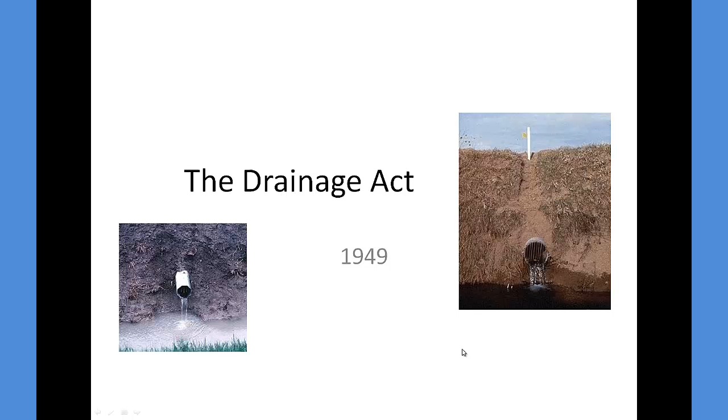This lab is studying the Drainage Act, which was passed in 1949 and hasn't been amended since.

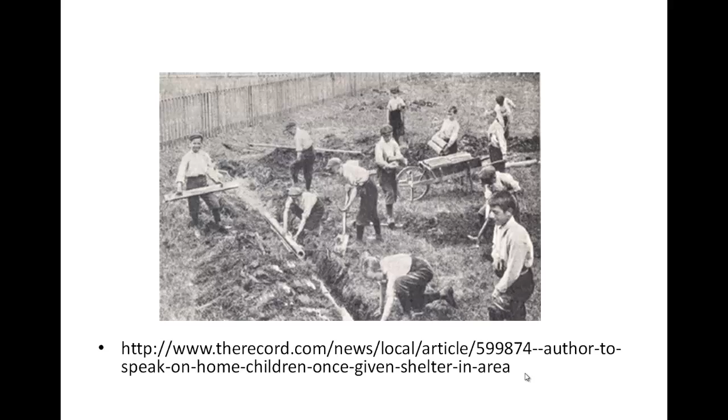To give some legal background, in law, which you'll be studying next semester, there are two types in Canada: common law and statute law. Statute law is written down numerically, with numbered rules we have to follow. The Environmental Protection Act is an example of that.

British common law is older than statute law, and it originates from when the king would travel from town to town, hear trials, and decide the verdict. He would sit on a bench carried along with him, which became known as the King's Bench, a tradition carried down to us. His decisions were recorded, ensuring consistency from town to town, so there was never any arbitrary decision.

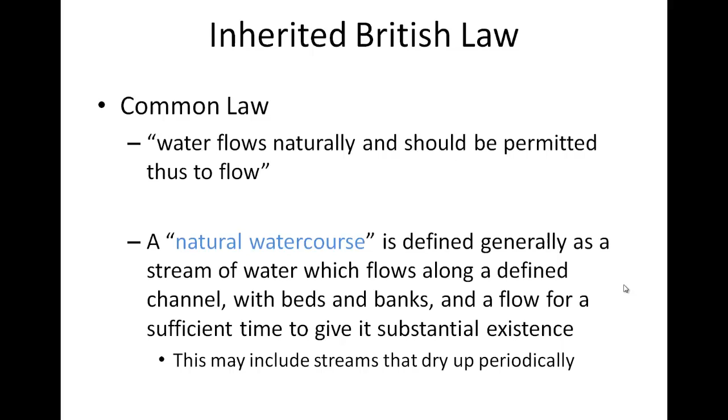One aspect of common law was that water flows naturally and should be permitted to flow. Water courses flow naturally and should be allowed to continue doing so. A natural water course is defined as a stream of water which flows along a defined channel with beds and banks, flowing for sufficient time to give substantial existence. Because it's a permanent channel, this includes streams that dry up periodically.

Along with the definition of a natural water course came the definition of a riparian owner: a person whose land is in contact with the stream. They are entitled to have that water pass by their land in its natural state, and to use it for natural or domestic purposes, like drinking water. They also have the right to obtain water power from it, though if they build a dam, they need approval from the Lieutenant Governor. They are also bound to submit to floods from natural causes.

If you're watching American media, you'll find this is not the same. The rights of a riparian owner are known as riparian rights, but riparian rights do not exist in the U.S., as their legal system evolved differently than ours. So if a stream flows through Texas and an owner wants to block that flow and dam it for their own use, they can, and it doesn't matter to the person downstream.

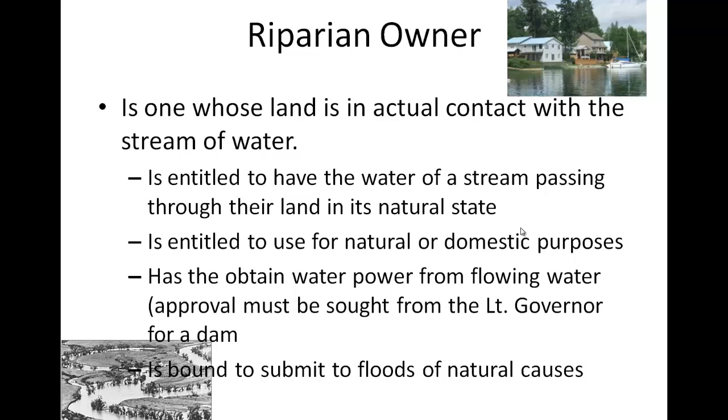Whereas if someone does this in Canada, they can't—they have to make amends to the person downstream. They can drain lands into the natural stream, provided it's within the drainage basin, and this has been backed up in the Ontario Water Resources Act. They're liable to upstream and downstream owners if artificial amendments are made to the stream which affect the flow negatively.

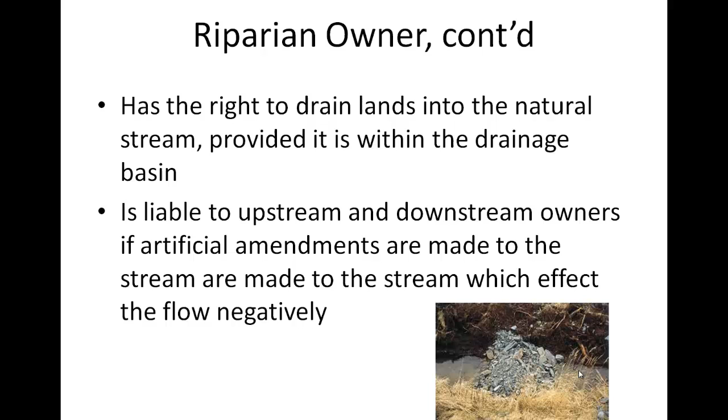For example, here someone's put in a rock pile dam. It's going to affect the water quality of those downstream temporarily, and also affect the water levels of those upstream—they're going to have to make it right somehow. It's the duty of anyone who interferes with the course of a natural stream to see that the works they've substituted for the channel provided by nature are adequate, accommodating everything including flood levels.

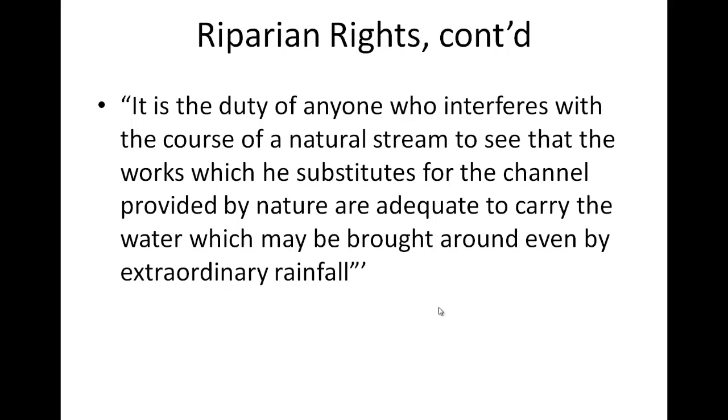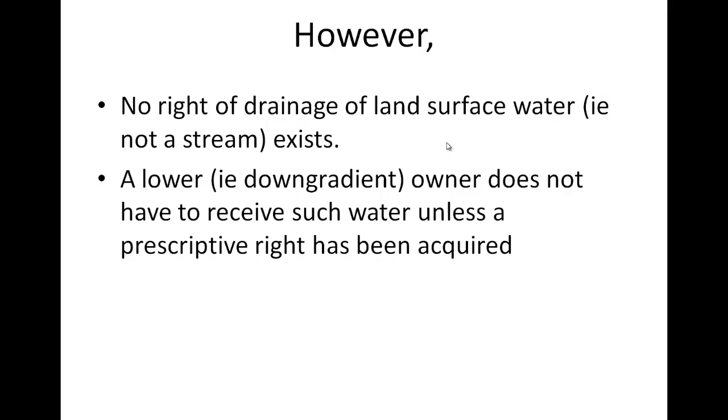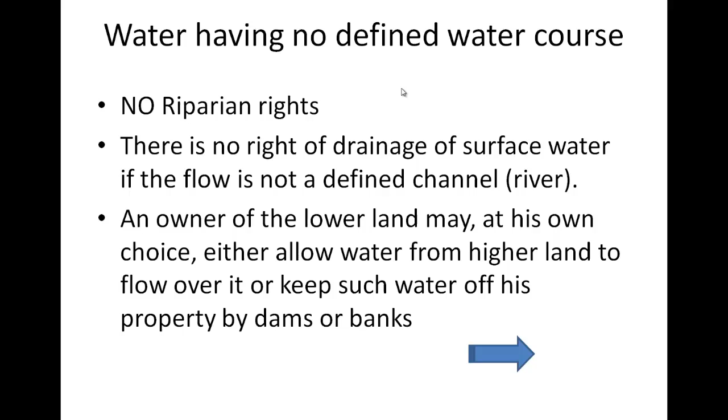But riparian rights only deal with permanent stream channels, not the drainage of non-permanent channels. So this does not apply to water draining off of lands, only to permanent channels. If you don't have a defined water course, there are no riparian rights—no right of drainage—and an owner of the lower land may, at their own choice, either allow water from the higher land to flow over it or dam it.

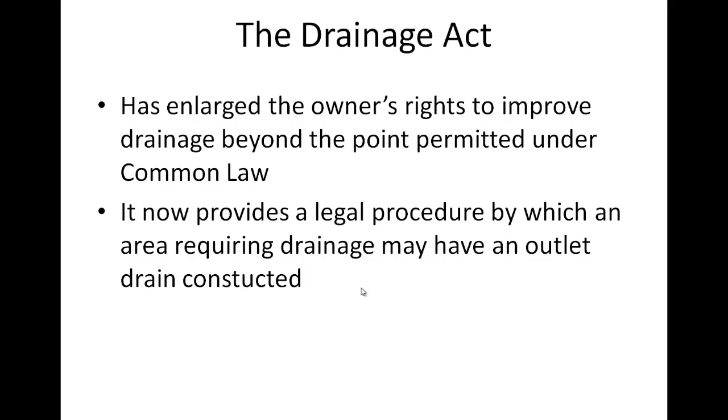This comes into effect when dealing with drainage of lands, especially for agricultural use or development. To aid the ability to drain land, the Drainage Act was passed. It now provides a legal procedure by which an area requiring drainage, requiring an outlet, can be constructed, with a legal framework for that.